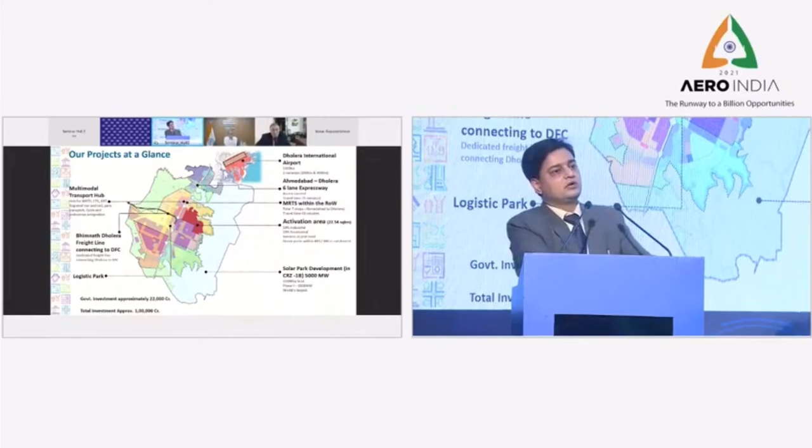We are also developing a logistics park in Dholera, which will be connected next to the Bhimnath Dholera freight line connecting to the DFC. Dholera is getting connected to the Western Railway, and through Western Railway to the Delhi-Mumbai freight corridor. So Dholera will have air connectivity, expressway connectivity, and railway connectivity through Western Railway to the Delhi-Mumbai freight corridor. Using that, we will also develop a multimodal transport hub, for which we have signed an MOU. So these are just some of the projects at a glance.

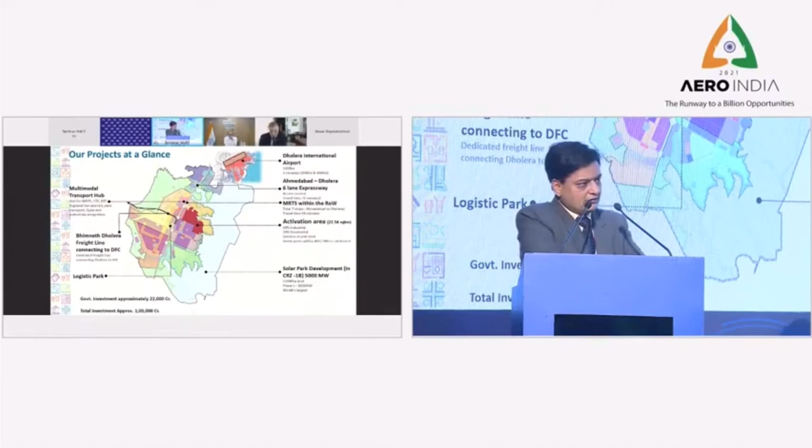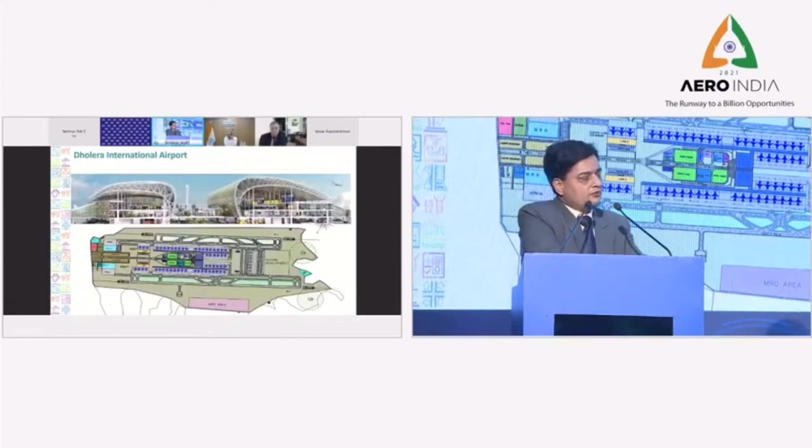I'll now get into detail of the Dholera International Airport, which is ideally poised for development, especially looking at the planning done for it. There is huge scope for developing related industries in the area just next to the Dholera International Airport.

The Dholera Airport is just next to the SIR which we are developing. It will not only cater to Dholera but also Mandal, Becharaji, and Sanand areas, which are already existing industrial hubs. Sanand is the place where the Tata Nano factory is established. This will be the major airport for Ahmedabad for all international flights in future, and we want to explore possibilities for MRO and air cargo facility, and for a regional airlines hub.

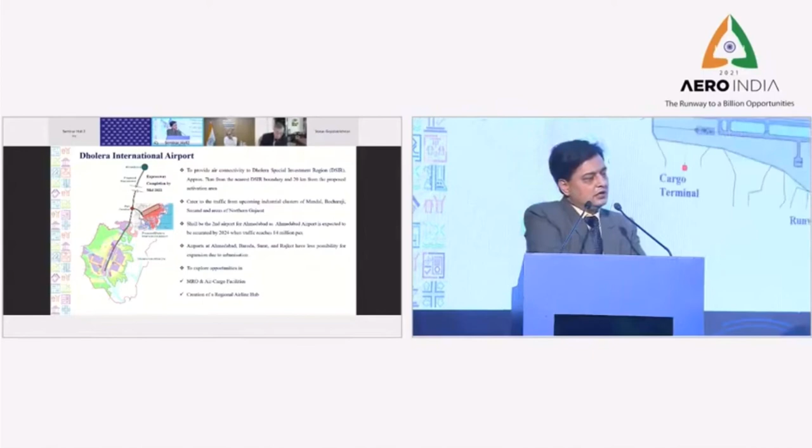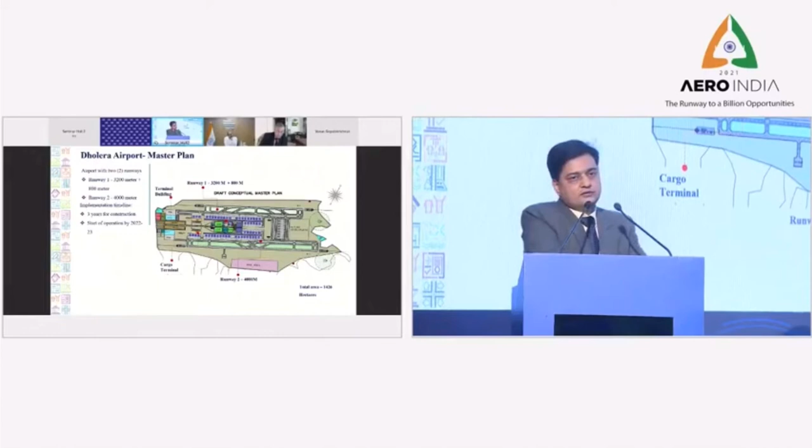If you look at the maps, this is the location of the airport. It is connected through the expressway, and in future MRTS will also connect to Dholera Airport. We have 2 runways, one is 3,200 meters plus 800, totaling 4,000 meters, and the second is also 4,000 meters. Roughly, we have got all the clearances for the airport from the Ministry of Defense and Ministry of Aviation, and we have formed a joint venture with the Airport Authority of India. The DPR and everything is ready, so we hope to tender out this project in the next 2-3 months.

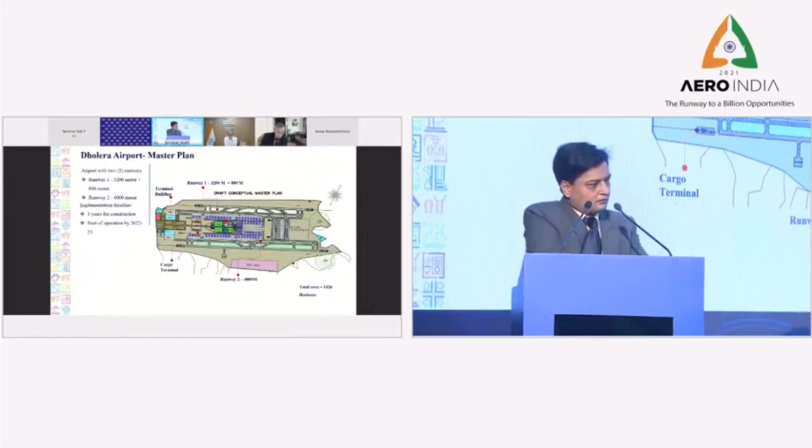Looking at the planning of Dholera, not only is all this land available with government, but besides the airport we have earmarked 20 acres of land for support services and 100 acres for MRO facilities. There are 2 runways, plus a 1,000-acre land just next to the airport which is also part of our project. So there's an ideal situation in which we are developing an airport which can be used for aeronautics and related defense-related sectors.

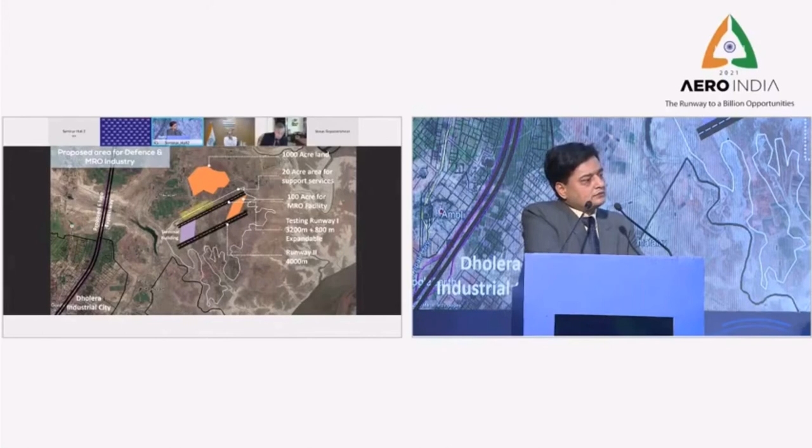Dholera is a vast area, more than 920 square kilometers. The development of Dholera has been done, will be done in phases. The first part of the area which we are developing, which we call the activation area, is 22.5 square kilometers, and it has been carved out of our two existing town planning schemes.

After the activation area, the next area which we are planning to develop—the activation area's infrastructure development is almost complete, and investments have already started there. The next area we are going to develop is the linear area just next to the expressway, which is also 137 square kilometers. Planning is underway and infrastructure work will start. The expressway tender has already been awarded and work has started on ground.

The remaining area of 263 square kilometers will also be developed in various phases. We have a system of town planning schemes in Gujarat, which we are implementing.

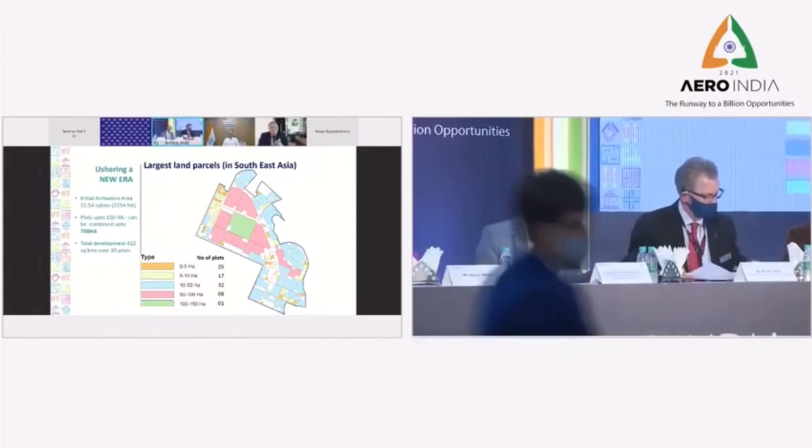In Dholera, what we have is the largest land parcel in Southeast Asia. We have land parcels ranging from 1 hectare to 150 hectares, and these can be combined to make very big land parcels of 750 hectares also.

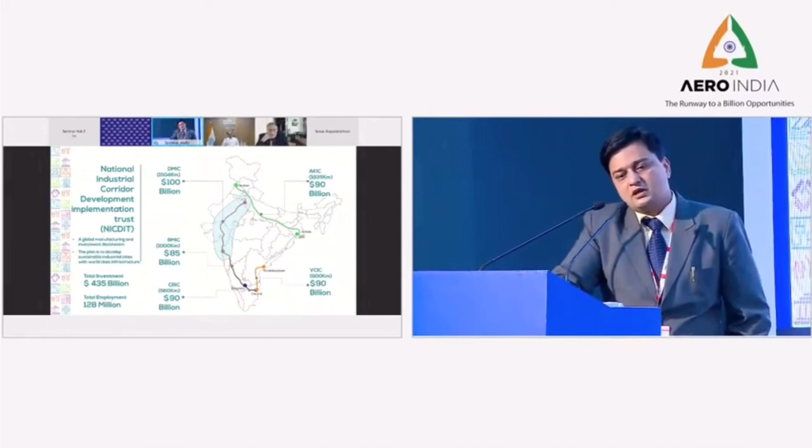Just to give you an idea about where Dholera is located, it's near Ahmedabad, 90 kilometers from Ahmedabad, and it's one of the nodes of the Delhi-Mumbai Industrial Corridor. The Delhi-Mumbai Industrial Corridor is part of the National Industrial Corridor development, which includes the Western Corridor and the Eastern Corridor. The Delhi-Mumbai Corridor is a part of that big project.

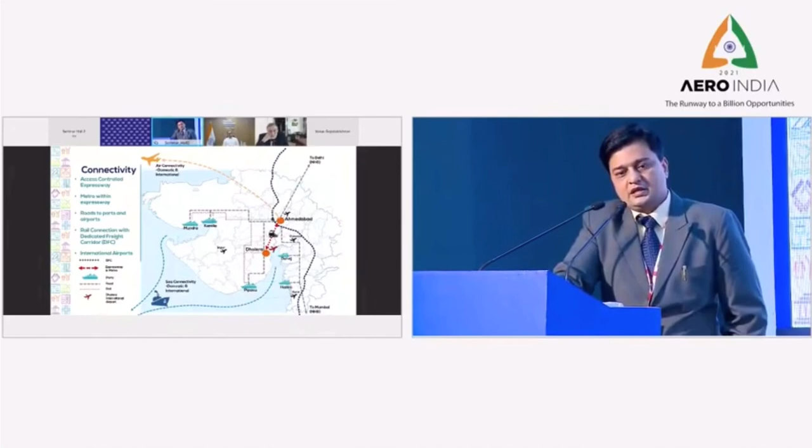Looking at the connectivity, the Ahmedabad-Dholera Expressway is under implementation. It's connected by railway. The ports near Dholera are Pipavav, Dahej, Hazira, Kandla, and Mundra.

The current area which we have already developed, some photographs of which I'll show, is 22.5 square kilometers, out of which the majority is industrial area, and also 22% is residential area, and the rest has been marked into several zones—high access corridors, public facility zones. This is how the planning for the activation area has been done.

The total committed project which we have almost completed in the activation area is $700 million, and that includes roads, underground infrastructure, water treatment plants, CTP, and power transmission.

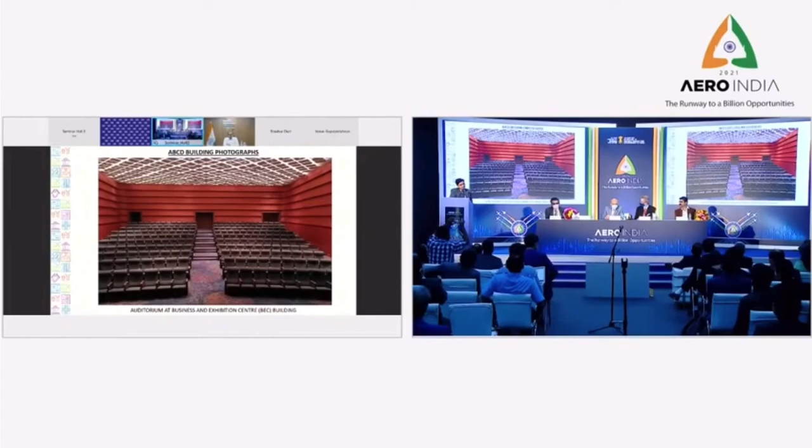This is an actual aerial photograph of our administrative building, where our command and control center and all the administrative offices would be. This is the infrastructure which we have created in that building—we have an auditorium and a business exhibition center. This is the outside view of our ABCD building, external view.

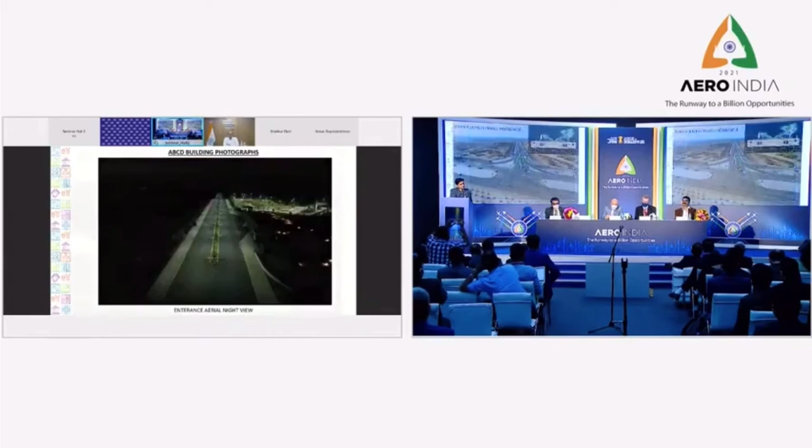This is the kind of road infrastructure already created in Dholera—this is an actual photograph of the site. All the infrastructure buried below the road is not visible, but this is a cross section, and this has all been done: power line, sewerage line, water line, ICT—everything already done. These are actual photographs of the site, showing the kind of infrastructure created.

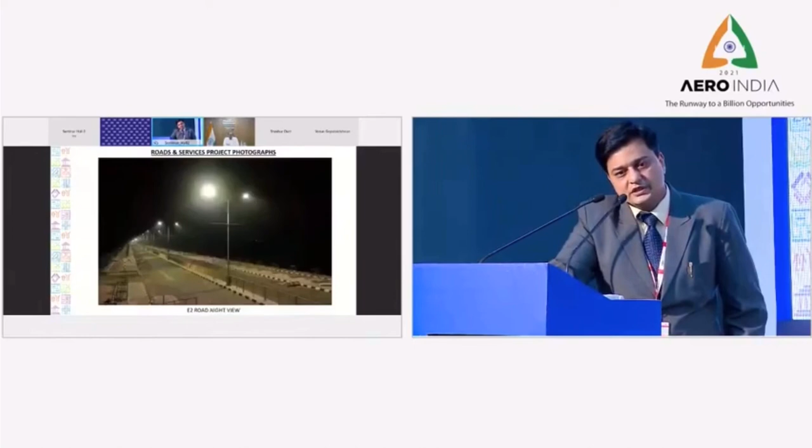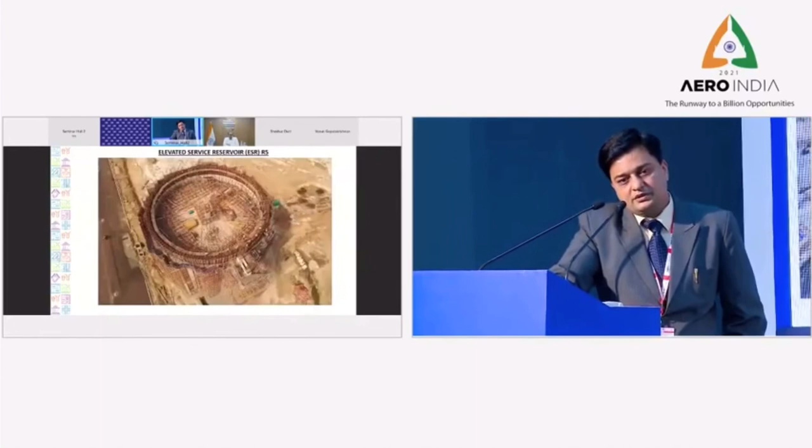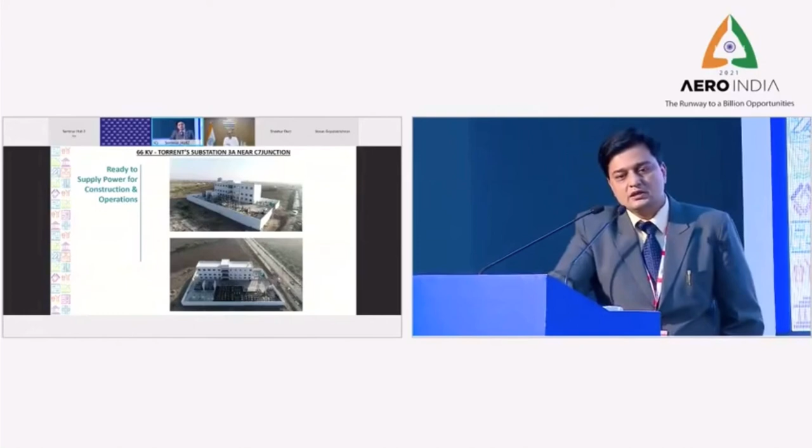This is the photograph of the Torrent substation which has been built in Dholera, and power distribution and everything is being done by Torrent in Dholera. This is the 66 kV substation of Torrent. This is the 400 megawatt Tata Solar Park, which is coming up in Dholera.

Dholera is an ideal location for defense, aero industries, heavy industries, auto ancillary, solar industries, electronics, IT, ITES, agro, and biotech and pharma industry.

One other advantage of Dholera is that we offer the lowest utility costs in India. Not only is the infrastructure world class, but the utility costs in Dholera are also the most competitive in India—the power cost there is the lowest in the country, and the water utility charges are also the lowest. We are also coming up with a seawater desalination plant using renewable energy. An ultra mega solar park is coming up, and for EV mobility we have done a lot of planning.

Dholera is one in its class—the first platinum rated green city of India. As MD of Dholera, I would sincerely welcome all of you to visit Dholera and consider it as a part of your future investment. I would be most happy to welcome you at Dholera. Thank you very much for the opportunity.

20 different sectoral policies, including for aerospace and defense—now our Industries Commissioner, Mr. Rahul Gupta, will be joining us virtually. He is already connected.